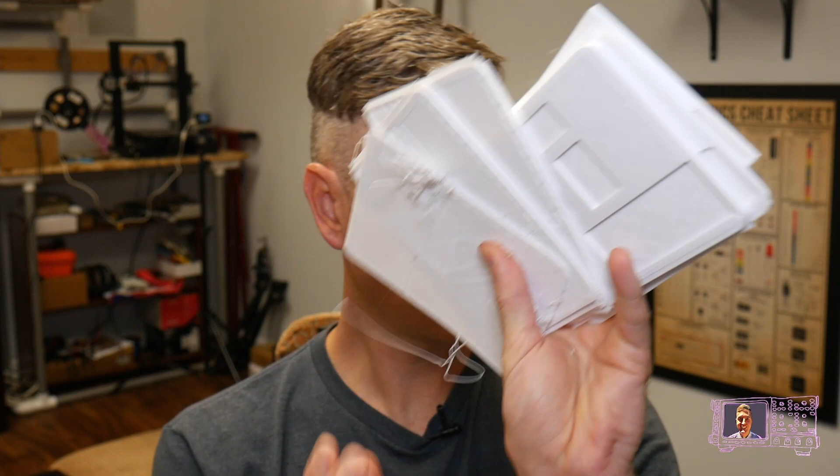I think we should probably set up the show. Let's set it up. We want to say, I'm terrible at 3D printing. I think that pretty much sums it up. Here we go. I'm terrible at 3D printing. I mean, it's absolutely awful, right? Let me see.

Let's get a light in here. This one is particularly spectacular. Look at that gob of filament. Filament is what the kids call it.

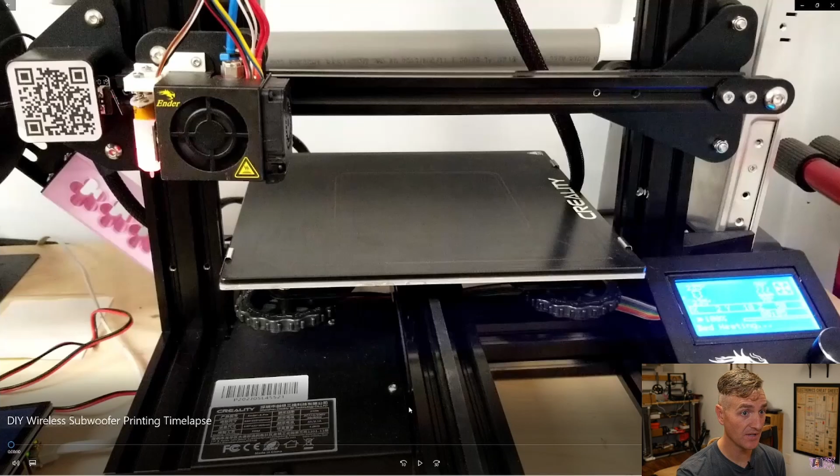So I needed a way to contain all of my pieces, and you'll notice that I have a little 3D printed platform that everything is sitting on, and it's all cleverly arranged. But I wanted to talk about the process of getting from a mess of stuff scattered about on my table into something that actually looks designed and is supposed to look this way.

So here is my 3D printer at work, and this is me beginning the process of prototyping a container. I am not great at visualizing things without actually holding them and seeing them. I guess I can't see it in my mind without seeing it with my eyes. And in order to see it, that's one of the beauties of 3D printing - you can have an idea and then print it out.

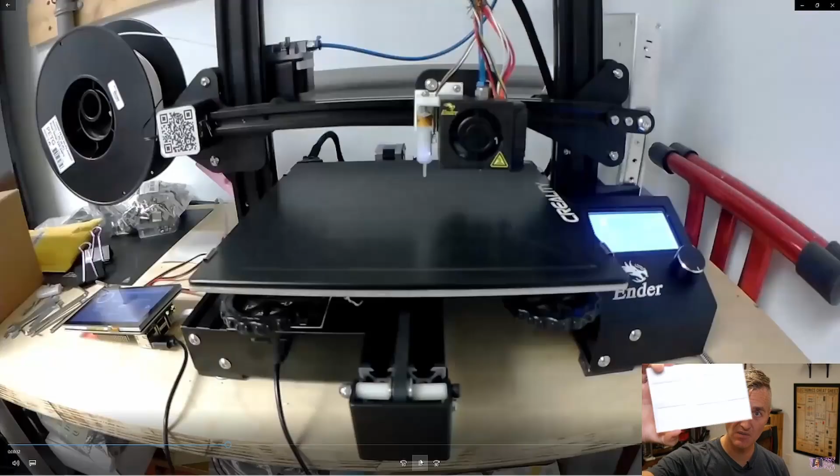So I printed it once. I changed the shape, so I printed it again. Here's the first printout. But the stuff didn't fit in the little holes. So then I printed it again, and you can see here the print is actually starting to fail. I have a little bit of stuff sticking up, so I added a raft.

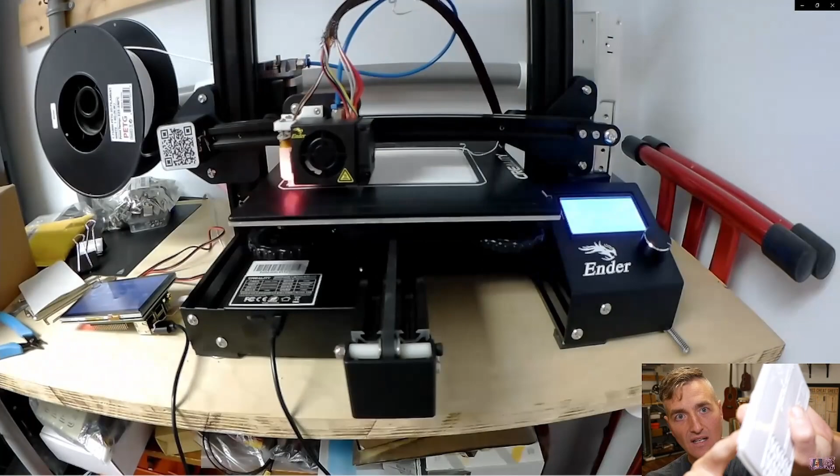Let's see, I have more of this. Here's some of my failure prints. Here's a print with a little bit of a raft - a raft is a layer of filament that you print directly on the bottom to give your print something to stick to. I had repeated failures, just failed over and over and over again. That's been kind of my modus operandi when it comes to 3D printing. I have tons of failures as I try to just get something to stick.

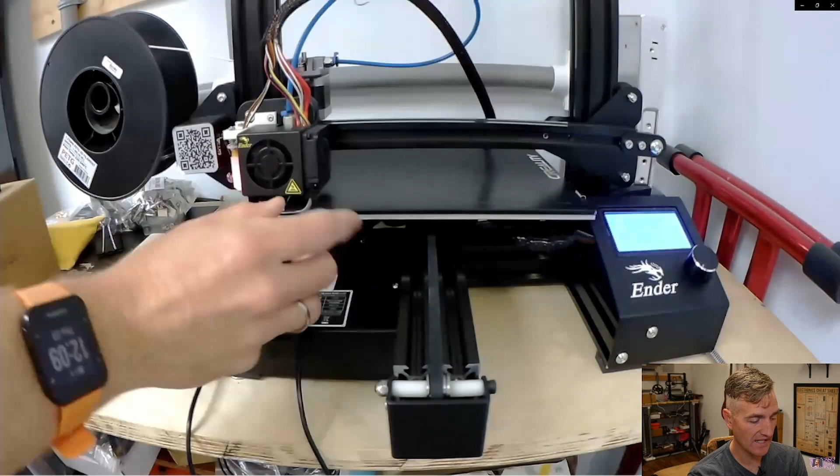One of my problems was I was printing with a material called PETG - P-E-T-G. It's a little bit tougher material than traditional PLA, which is the bog standard printing material. Eventually I switched from my PETG back to PLA, and that's where I got the gold filament out. PLA for me is easier to print - I just haven't mastered my PETG printing.

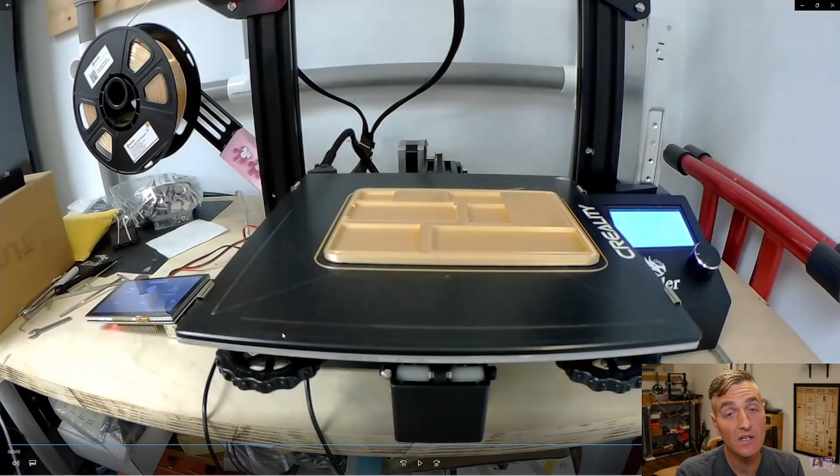There are so many knobs to tweak when it comes to 3D printing. You can print it faster, you can print it slower, you can print it hotter, you can print it cooler.

But what you see on the screen right there is actually what is on my desk right now. So if I go back to the webcam, that is what is holding all of my components. This is where I started. This was actually a really good print, and the edges looked good. It did curl a little bit in the corners.

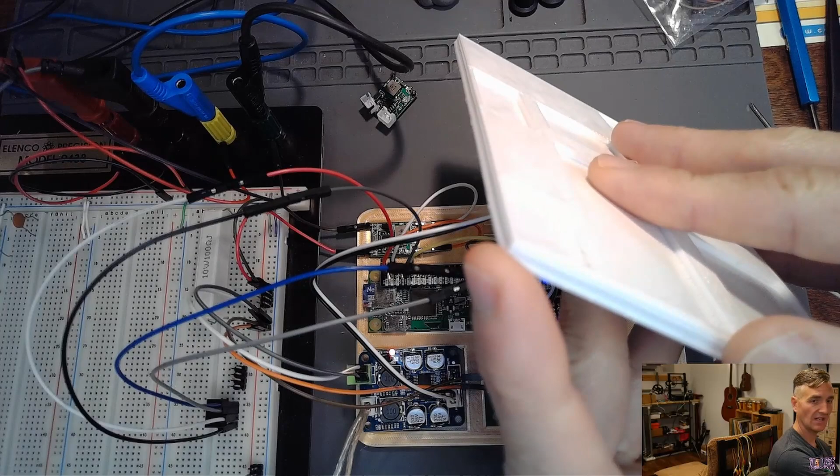I'm not really - can anybody tell me how to stop that from happening in my PETG? I don't know how to make this stop, please. And from there, we really hit the skids. We went downhill, so we ended up with stuff that looks like this, which is a hot mess. Stuff that curled right up off the bed and then kind of came loose.

As your prints curl, they will detach themselves from your print bed, and once your print detaches itself from the bed, it's ruined. It just can't stay still. I got a second pretty good print though.

This was printed with what is called a brim. You see this little edge of filament around the main object. That brim is designed to allow the print to stick itself down to the bed a little bit better.

This corner, I did do a little bit of research on. So this corner is potentially curling because the bottom layer is cooling too fast, and that causes the PETG to curl up, like that. And that's bad. You want it to stay flat on the bed.

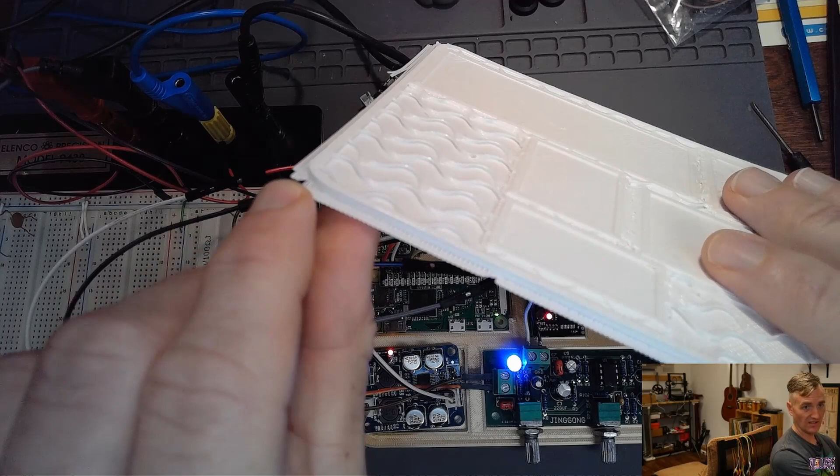The RAFT is supposed to make the bed a little bit more adhesive to prevent that curling. But the RAFT also creates its own set of problems. It's kind of big, and it's a lot of filament to just waste on your print. And it's a little bit difficult to remove, it all gets really stuck together.

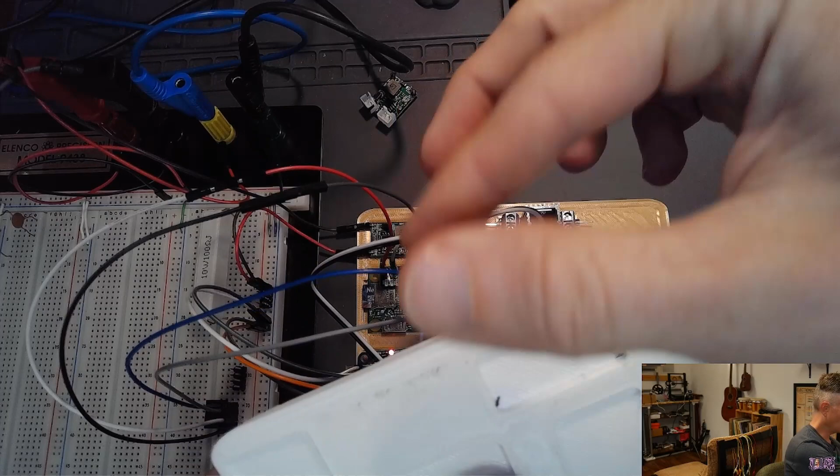I also had a bunch of stringing, these little strings of filament. I did read that PETG is really bad about stringing, and I'm not sure how to correct that. There's again, tons of knobs to turn with 3D prints.

That's the downside of 3D printing. The upside is you can just prototype different box shapes and different containers or just different objects and get them in actual physical meat space to look at, which I absolutely love. That is the only way that I am really successfully able to prototype.

So last time we did some woodworking to do our enclosure, but this time I thought I would try some 3D printing. So this is just a flat board or flat base, and in this base are these little holes, and the holes have been designed to fit the boards.

The big thing I love about being able to prototype like this is that I can put it in my board, look at it, decide that I don't really like the fit of something, change it, and then print it again. So what happened when I printed all this out and set it into this little board, I realized that I have things arranged a little bit awkwardly.

So I have my power up here at the top. I have two different DC to DC adapters for my wireless subwoofer, down into my Raspberry Pi, over into my DAC. This is my subwoofer preamplifier, so that cleans up the high-end audio sounds and allows only the low-end audio to get into my subwoofer amplifier.

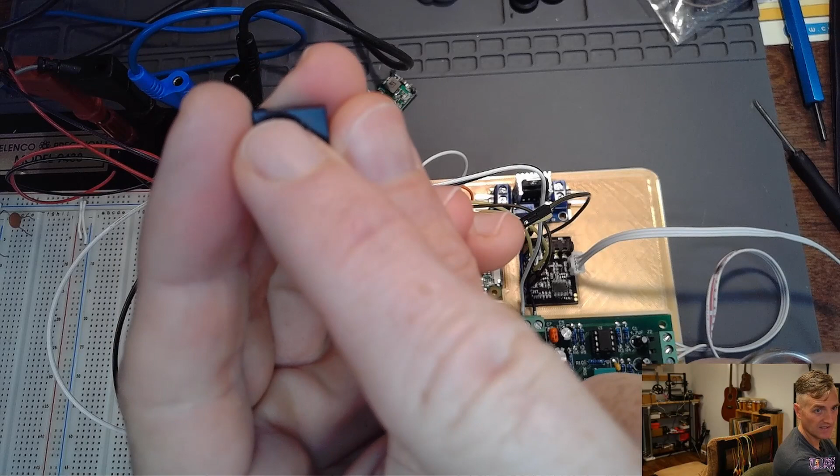And with this device right here, I think I can actually use the power out from my Raspberry Pi. So I think I can use the 3.3 volt lines of my Raspberry Pi to power my DAC, which has definitely been a no-no in the past, as you've watched it all.

You know that the Raspberry Pi's power rail is super duper dirty. It is nasty. You can hear it in the speakers as soon as you plug your DAC into the power rail. You can literally hear just the noise on the power rail.

With this little isolated power rail, power DC to DC converter, since the input is totally isolated from the output, the noise is not allowed to pass through. So let's look at the data sheet for this really quickly.

S-1WR3. Okay, let's turn the monitor on so you can see what I'm doing. So I found this little guy right here, a B0505S-1WR3, an isolated DC to DC converter. You put in a 5 volt input and it creates an isolated 5 volt output.

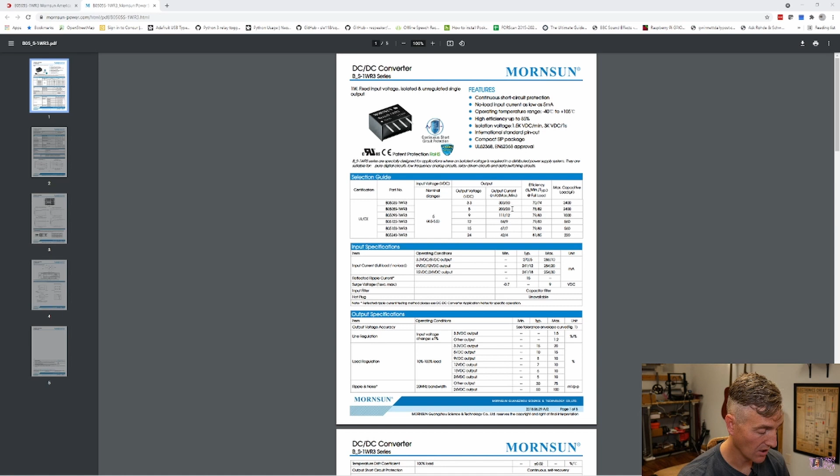One other thing to note when using one of these isolated DC to DC converters is that they cannot actually output much current. You'll see that this little guy can output a maximum of 200 milliamps, which is pretty low power. You would not want to use one of these chips to try to power an audio amplifier. It just does not have enough juice.

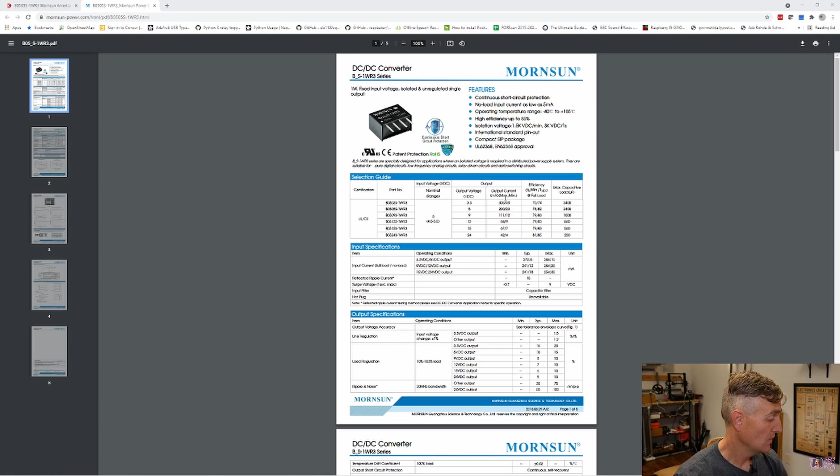For the DAC, though, let's look up my PCM5102. Let's see what the power requirement of this animal right here is. Pretty sure it's low. Here we go, the 5102A.

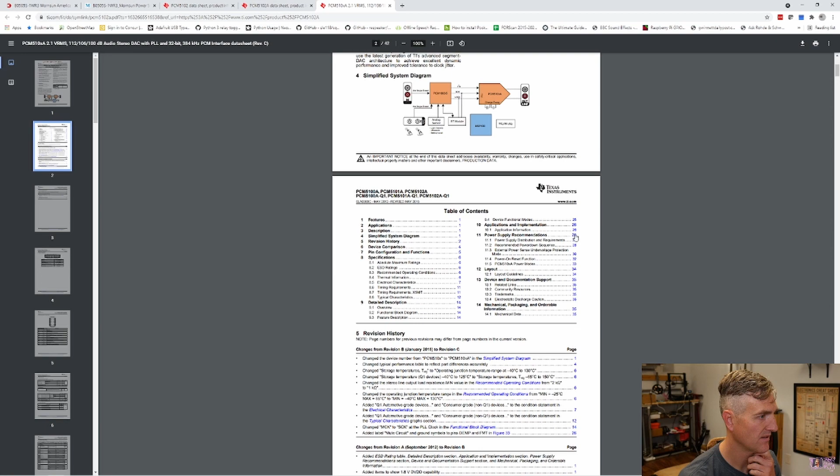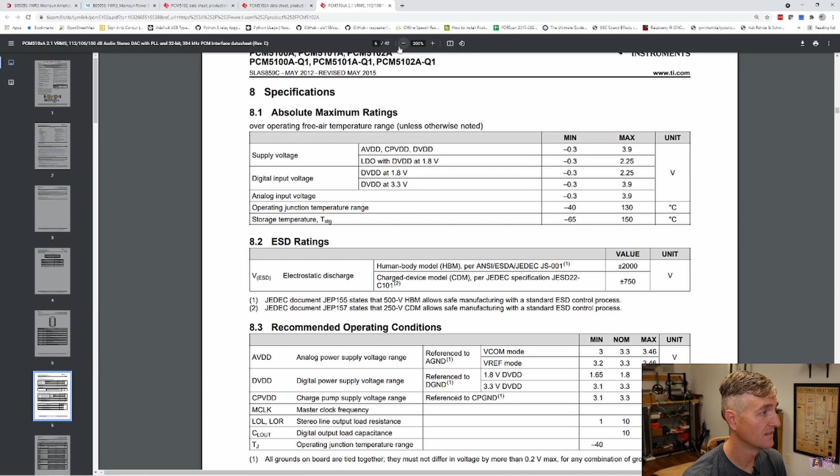In here somewhere, power supply recommendations, there's going to be a maximum current draw. If we go to the data sheet, we are looking for amps. That is what we are looking for, amps. And you know what might help is if I zoom in a little bit so we can all actually read it, because if I'm squinting on the screen of your phone, you really have to be squinting. It's crazy.

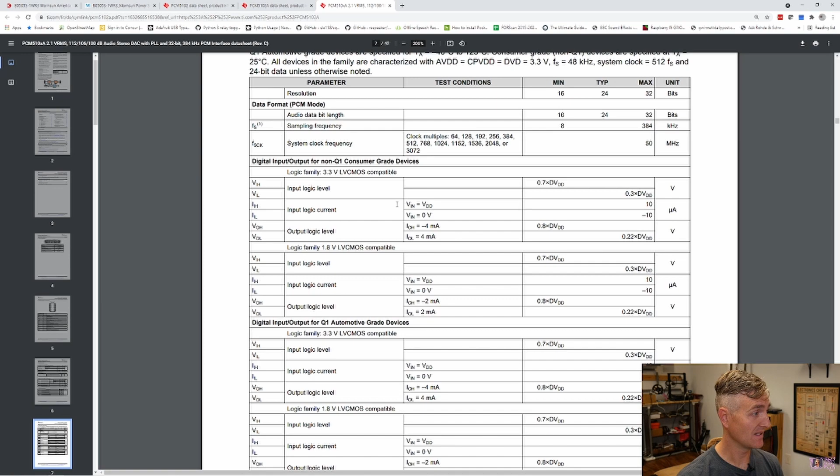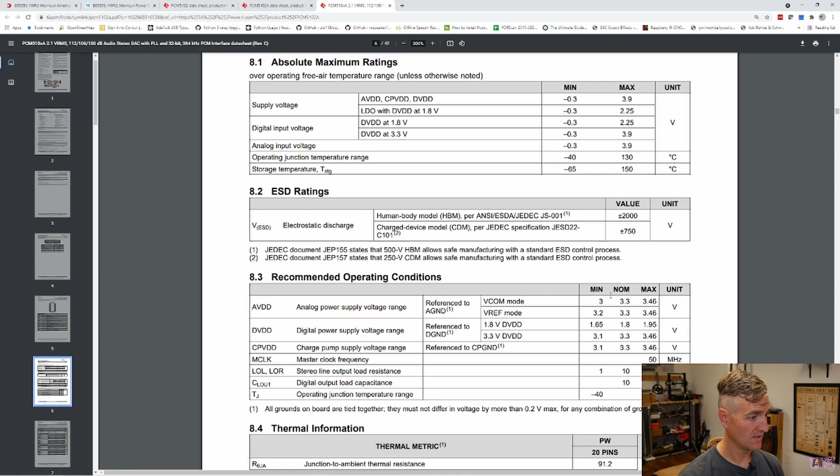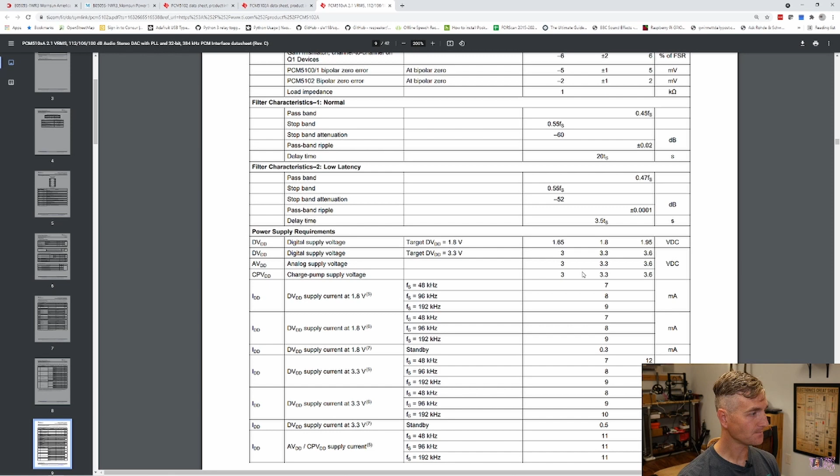Okay, I have absolute maximum ratings for voltage. Does it have an absolute maximum rating for current? Let's see, voltage, the amps—this is in microamps, which is a good sign, because if my power rail can only supply milliamps, then having something requiring microamps is good. Okay, here we go, power supply requirements. Let's see, the maximum number I see here, 12 milliamps, 32 milliamps—oh, now we're getting a little bit high. 185 milliamps, that is the absolute—or 187 milliamps is the absolute maximum.

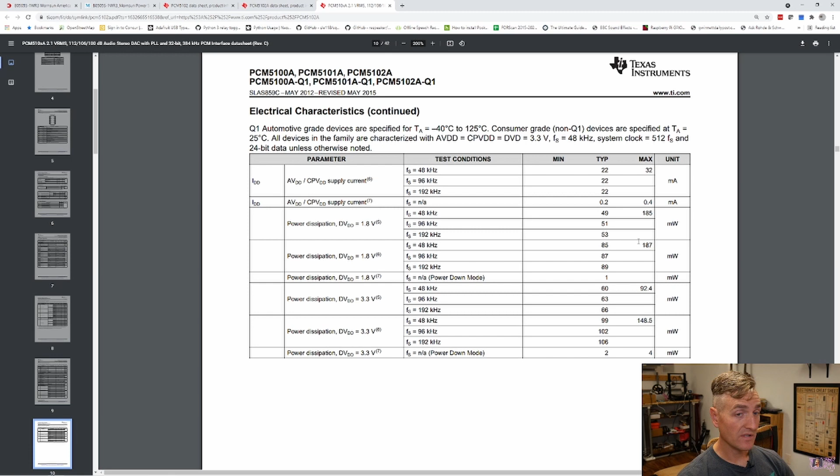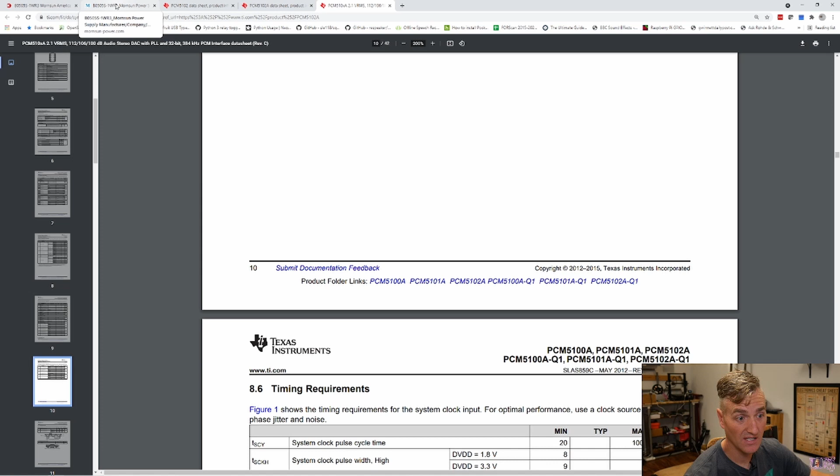And our DC to DC converter can supply 200 milliamps, so we should actually be good. We should be in like Flynn. Excellent news. But that's because I'm only using it to power the DAC. I'm actually using a different power supply to power my amplifier board, which is fine—I just really need to keep that Raspberry Pi off the power rail of everything else in my system, because it will just create a ton of noise.

Now that I'm using this little chip to power my DAC, I have an extra DC to DC converter, this LM317, or I could use another one of these little chips. What is this? This is the MP, I think it's the MP1584. Is that right?

MP1584EN, so I could use another one of these. Anyway, what I'm trying to say is, when we looked at our amplifier data sheet, that is the, I think it's the TPA3118. Is that right? Pretty sure that's right. There we go, I should probably bookmark these. But this is the amplifier that we are using.

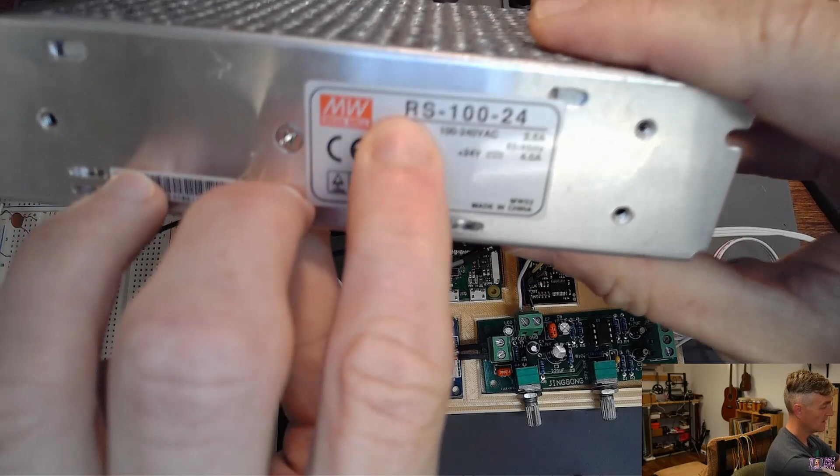Right now we are powering it with 12 volts, but that doesn't allow it to reach its maximum power. You have to use 24 volts to get to your maximum power. So with that in mind, I purchased this little guy right here, this little Meanwell RS-100-24. It's a 100 watt, 24 volt power supply.

Yay! But all my DC to DC converters are set up for 12 volts, and I need to set them up for 24 volts. Also, this preamplifier wants 12 volts, so I need to convert this 24 volt power rail into 12 volts. So that's going to be down the road, getting all my power rails straightened out. And while I'm straightening out my power rail, I kind of want to reorganize this.

So let me show you the tool that I used, so I can embarrass myself on YouTube here. The tool that I use to do my 3D printing prototyping, Tinkercad.

You'll notice that we also have a dollhouse. Lil G, the junior O-scope wizard, is working on a slingshot. And I have my wireless subwoofer box. Oh my goodness. Well, here it is.

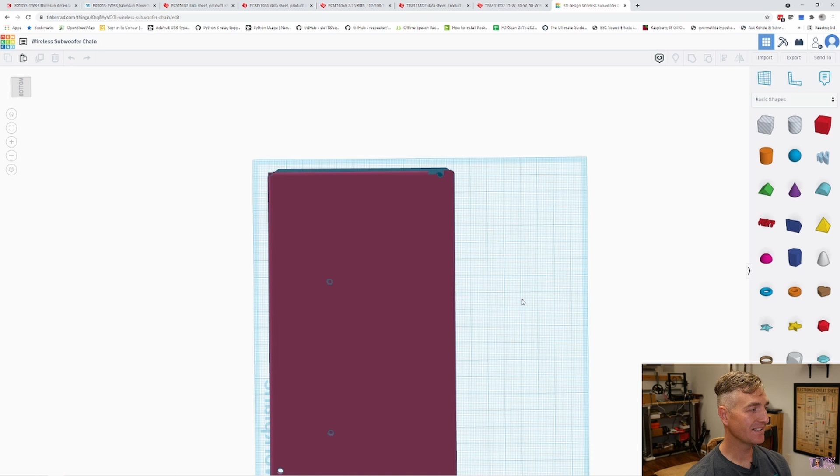I like Tinkercad. I know there's much more professional CAD tools, computer-aided design tools, but Tinkercad is so easy that I can work with it and not have to spend hours and hours learning it. I can just make things happen.

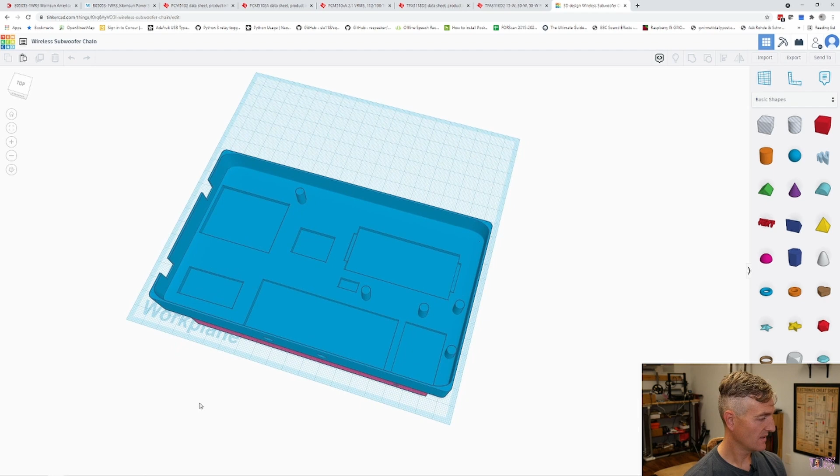So here is my box that I kind of have morphed into, and you can see this box that we're looking at online is actually printed out right here now. There are some problems. Right away when I printed this, I could see that the outside walls were too thin. They're super thin and so have just no structural integrity.

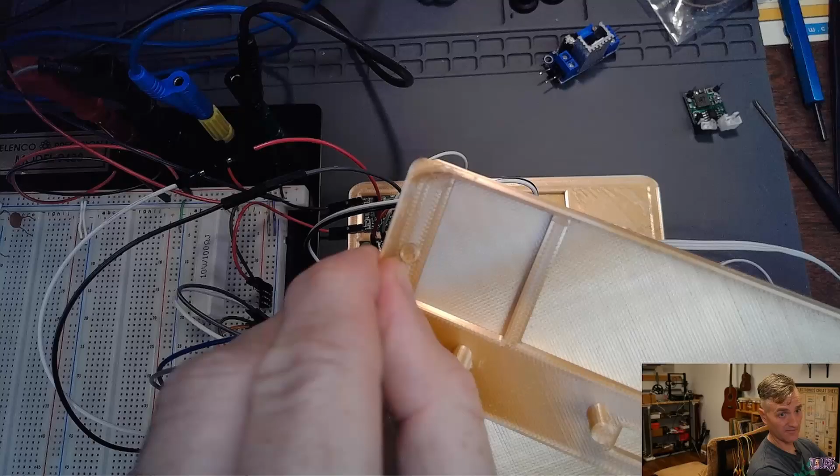And these little posts are going to be kind of wire guides to allow my wire wrap to basically keep my digital lines away from my power rail lines. This wire guide was too close to this wall, and it snapped off when I was trying to cut some of the stringing out from the inside.

But, I've reorganized this, so now my preamp sits here, there's going to be a DC to DC converter sitting here, and then my amplifier's up here, so my 12 volts or 24 volts should all stay over here, and then my Raspberry Pi sits way up here away from the audio chain. Hopefully kind of keeping the noise to a minimum.

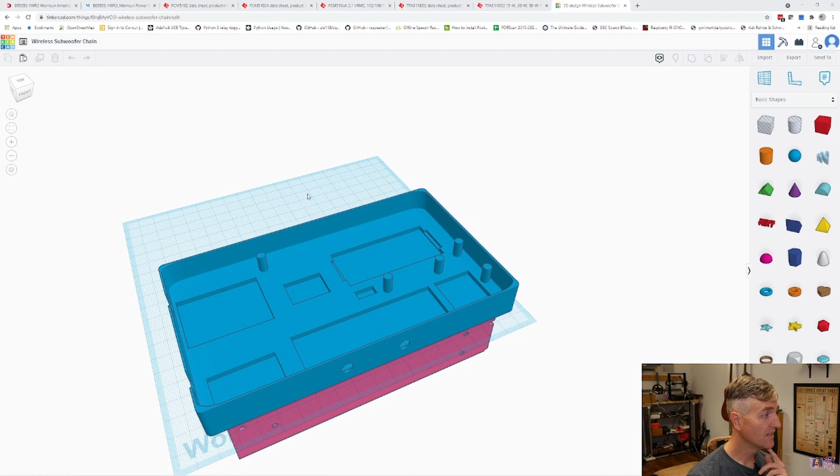But if I get back into Tinkercad, we can actually look at what I've been doing. So this shape is a combination of tons of shapes, and that's kind of how all CAD works. You start with simple shapes and then start adding more and more shapes, and then you combine them all and you make more and more grandiose designs.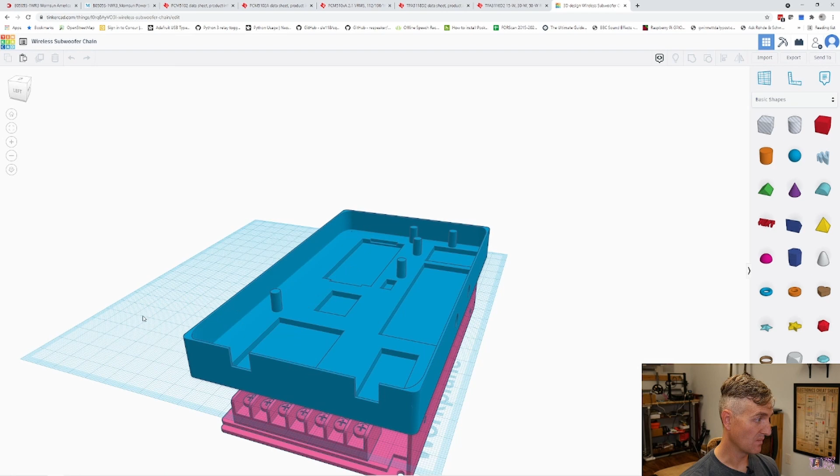So this started out with just a simple box, and then I made holes, but underneath I actually imported a model of the Meanwell power supply, thinking that eventually this top enclosure will connect to some kind of second enclosure that will go around the power supply and allow me to sandwich them together and somehow attach them to my actual subwoofer in a bucket. Either screw them to the lid, or put them in the bottom.

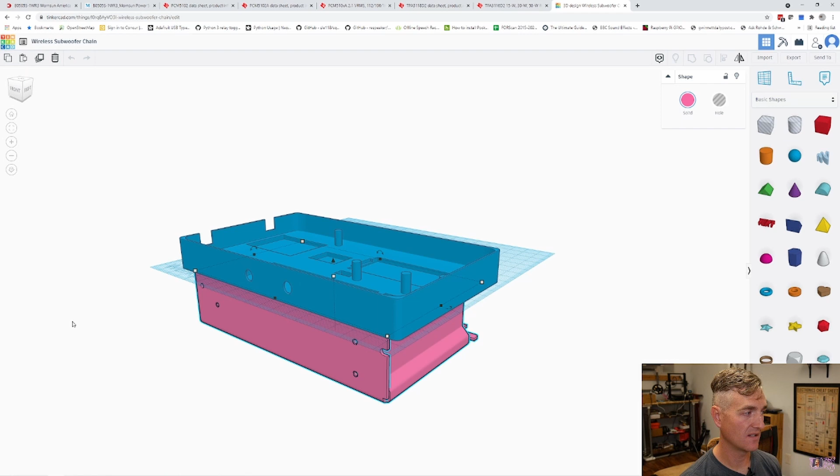I do need access to some of the knobs of the preamplifier, mainly the volume and the filter knob, really just at the beginning to set it all up. And then that could be put away into the side. I'm a constant tweaker though. If there's a knob, I'm going to turn it.

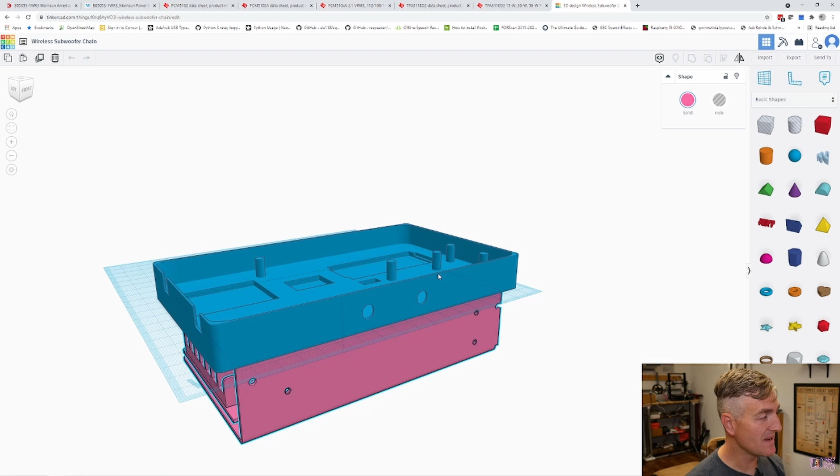So I'm not sure how that's going to go, but I want to make a box. Let's look at what goes into this.

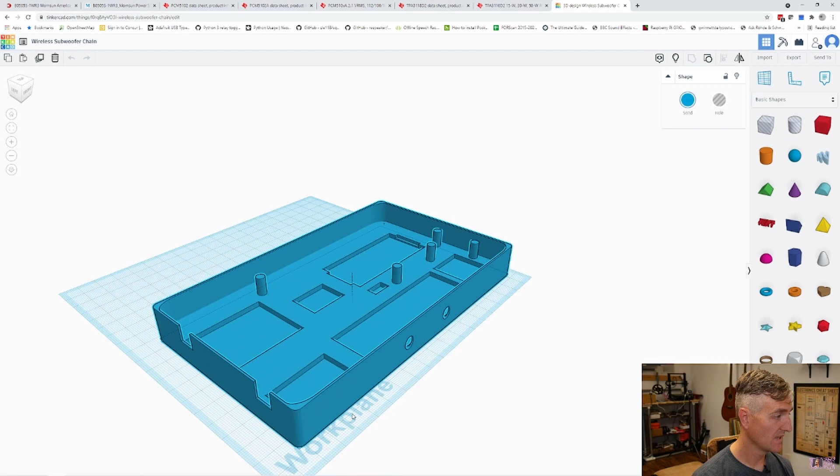So if I start into Tinkercad and I ungroup everything, first of all, I want to take this power supply model and hide it, just to get it out of the way. And then let's take a look at everything that goes into this box.

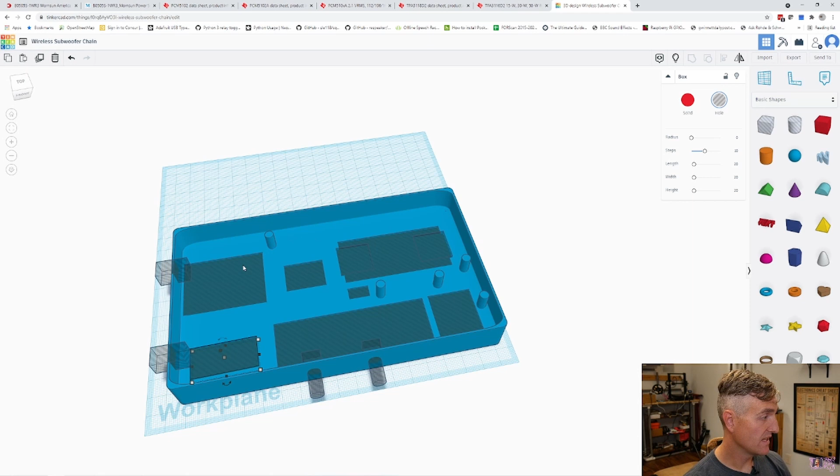So here is the first stage. I have a bunch of holes that represent the different components in my design. And I can move these holes around, and I've printed them enough to know that these holes will actually fit the board. Now I had to adjust these holes about 10 times before I got them perfectly around the boards.

I do have a micrometer, and I actually did use the micrometer to measure the stuff on the boards, to measure the dimensions of the boards. I'm not a mechanical engineer, so I don't understand tolerances that well, but you needed more and more tolerance.

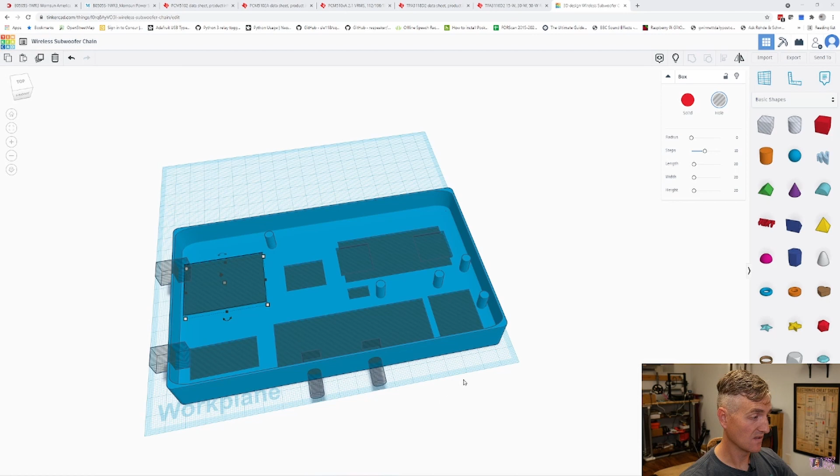You don't want too much extra space in the hole, but enough space that my printed circuit board can fit snugly into these little spaces and not move around. I was thinking I might use just a dab of glue to hold them in. Some boards actually have screw holes in them, so I could add screw holes into my design - that feels like next level stuff. You can see the level of detail I'm able to work with. But I need to make these outside walls a little thicker, and I need to do a test fit with the one I've printed now to see how the wires work through the system.

I have to hold things to really understand how it's going to fit together. I just can't do it in my mind - I don't have that skill. That is a wonderful skill to have. I don't have it.

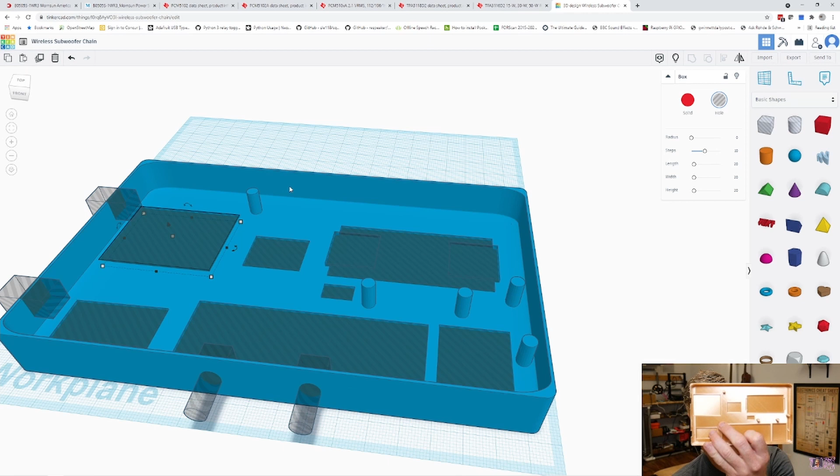So before I print this again with tweaks, I'm going to put everything into this container. I'm going to run some of the wires through to see how it all fits, and then go from there. What we can do right now is pull all this stuff out and start moving it over into this box that I've printed up and just see what it looks like, which might be kind of cool.

Another thing I need to do - let's turn the camera so you can see me - is figure out what I'm doing with my Raspberry Pi endpoint here and Logitech Media Server.

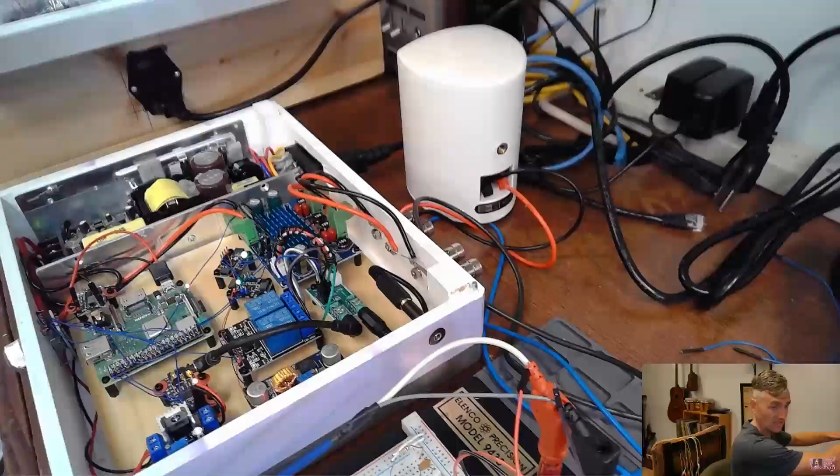On the last episode, and a couple episodes before, I've talked about Logitech Media Server, which is the server software I'm using to move music around - to get music from my phone or device out to the speakers. I have a speaker right here, and then my subwoofer down here. So I need to get the music off my device and into those speakers, and I was using Logitech Media Server because it allowed me to wirelessly synchronize different devices.

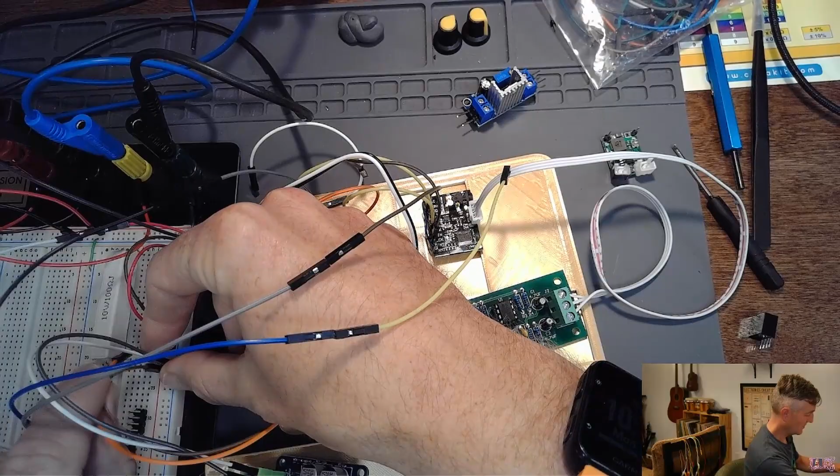But it doesn't work 100% of the time, especially from Spotify, which is my main streaming service. So I need to do a little more research on how to make a more stable connection. I also need to figure out how to turn the amplifier off when I'm not using it - how do I utilize the mute function? Both of my amplifiers, the one in the subwoofer and the one we made before, have mute features that can work. Now, do they work? Only if I wire them up and program my device to actually use that feature. I think Logitech Media Server allows me to do that.

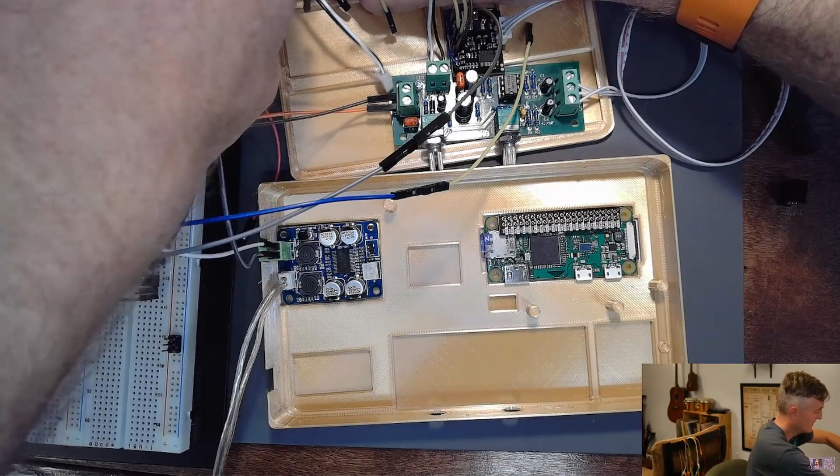Okay, so right away I can see a mistake I made. I made the holes for a lot of these boards a little too deep when I printed it. You make mistakes right out of the gate - everybody makes a mistake, and that's okay. That is the beauty of rapid prototyping: fail fast, and then just fix it. Don't worry about it, that's why we're prototyping to begin with - we're trying to see if things just fit.

Okay, so I have my amplifier board here, my DC to DC converter here. I'm going to switch it out - I have a different DC converter, the same one but with the pins connected a little differently. Raspberry Pi here - actually fits, that fits pretty good. Now I need my DAC, my digital to analog converter, goes here. I think it'll actually go like this.

Oh, now I'm realizing - if I put it like this, it is close to my preamplifier, you can see. I have some holes that I'm hoping actually fit. This is the real test - I have walls now and holes in the wall to try to fit these knobs. Y'all are about to see me do a test fit for the first time. We'll see how good this fits.

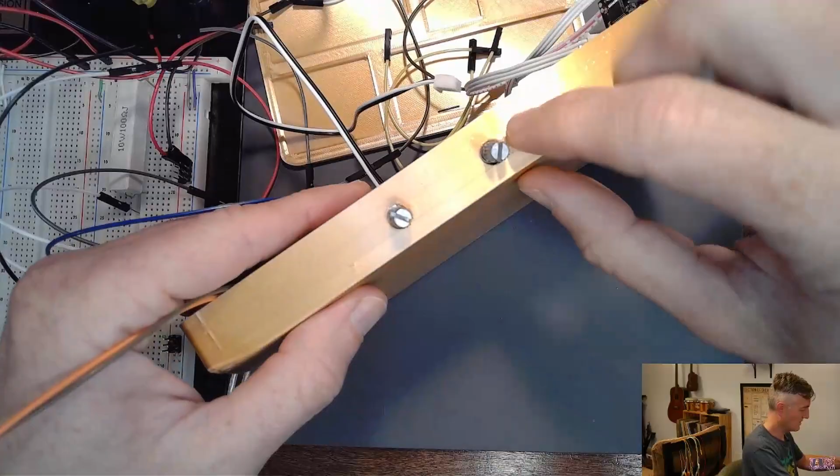Oh my gosh, does it fit at all? No - look, it does fit, but I need more space on these holes. These holes are tight - not light tight, they're tight around the knobs. Ah, so I messed that up. That's okay, that's why we're prototyping.

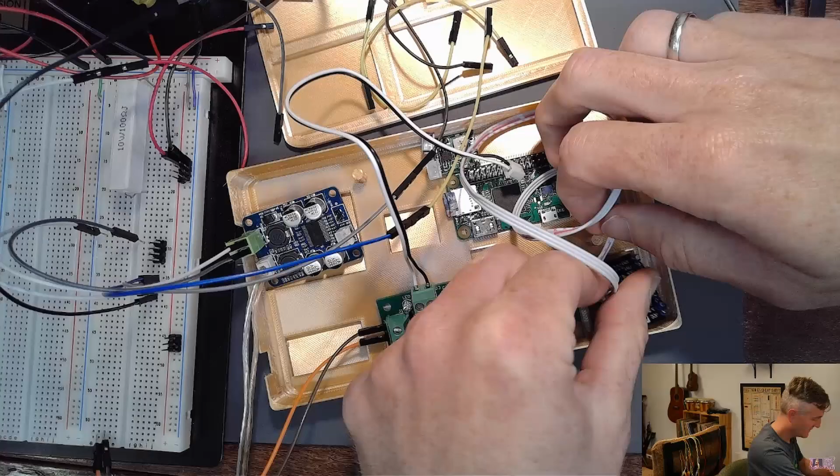Okay, so that goes there roughly like that. Need to make these holes bigger. And then I have a spot for my DC to DC converter for the 24 volt to 12 volt from our preamplifier - that fits well. And finally I have my little isolated DC to DC converter that hopefully fits in this little hole right here - and it does, it does. So we have our layout roughly like this. That feels pretty good, you know?

I'm noticing that with the DAC pointed this way so that I have my audio signals directly into my preamplifier input, the power is on the bottom, and the power is going to come from the Raspberry Pi. I actually want the Raspberry Pi like this, so I don't want this power signal to go around my audio signal. So I'm not sure how to route that. It's a good question. I might need to... if I do it like this, then my audio signals would still cross over my power signal.

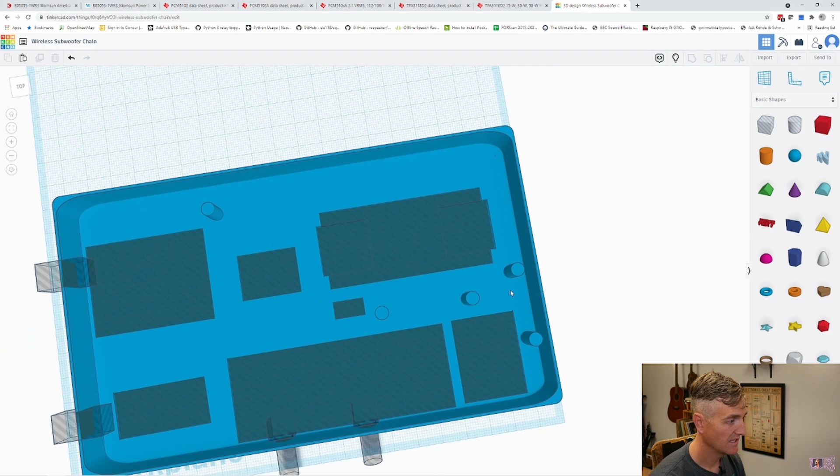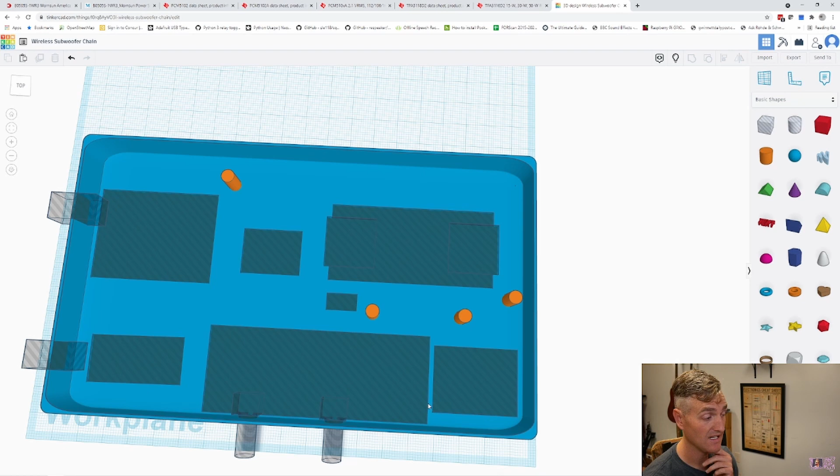The beauty of 3D printing is that you could just make a real quick change. So for instance, if I wanted to change the way the DAC is sitting in there, I can go back to my Tinkercad software and select the hole that represents the DAC, this guy, and rotate it 90 degrees. Now I can see that, oh, this is going to be in the way. I probably need to ungroup some of these things. So let's take this post, delete it, move this over so I had a little bit more space. Now the audio output could go from the bottom side of my DAC over to my preamplifier.

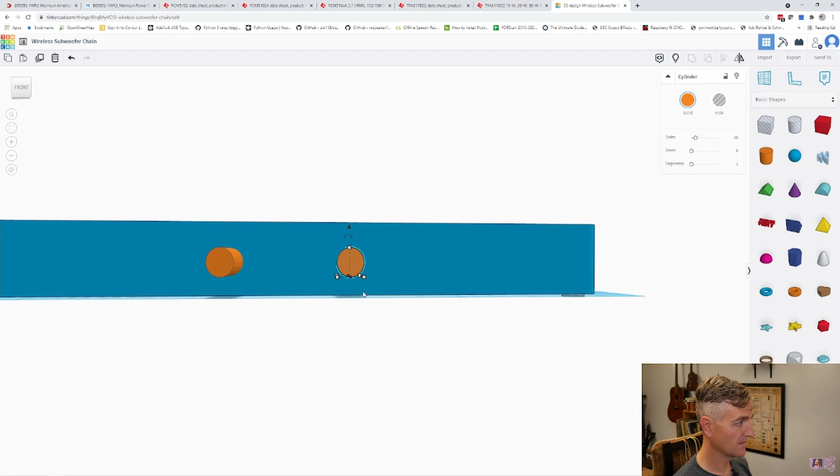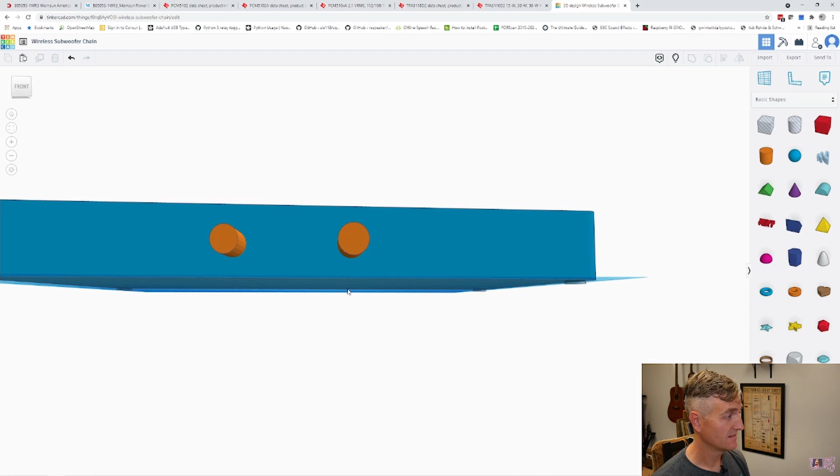I can also go over here and ungroup this. I know that these holes need to be a little bit bigger. So how can we make this hole a little bit bigger? I could make it that, like that, and that's a slightly larger hole. I'm sure there's probably an easier way to do that, but that's why I'm using Tinkercad, because I'm just not the greatest CAD artist that there ever was. I'm going to undo that because I'm just not sure exactly if that was the right move.

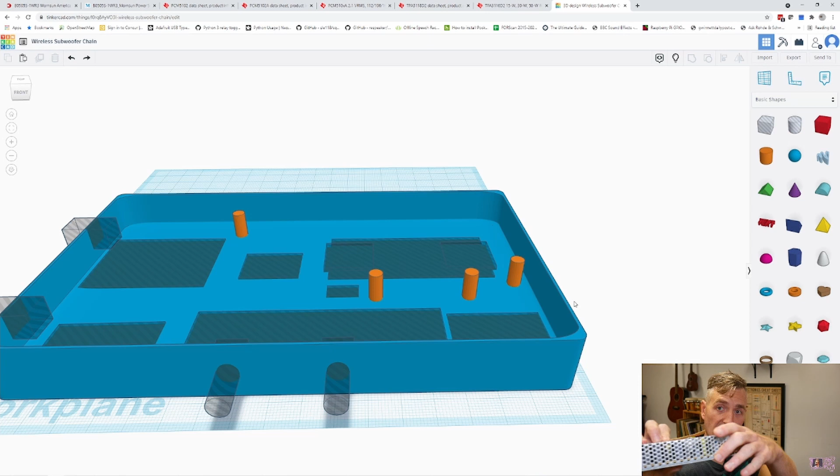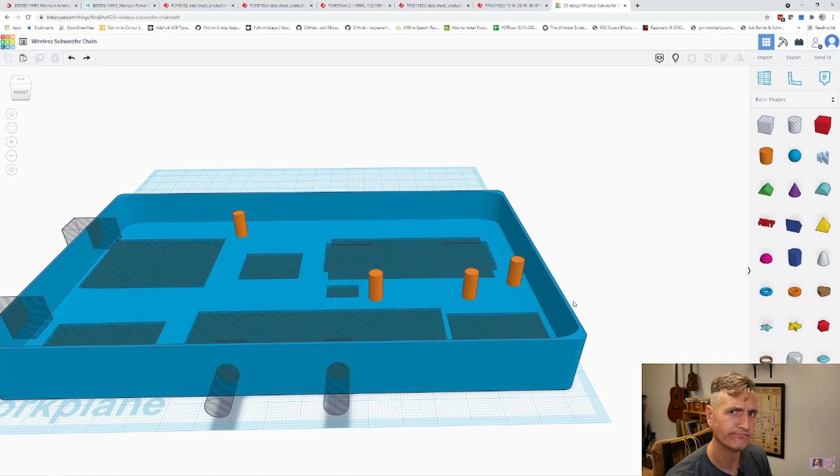Anyway, you can see where we're at. We're still prototyping the container, trying to get everything arranged inside of my container and then eventually attached to this power supply, kind of sitting on the top. So I'm thinking there's going to be a lid that kind of goes around the edge of the power supply, and then the other part sits on the top. Or really not a lid, just a whole box that probably goes around the whole power supply. All of that will go into some sort of weatherproof container that I will purchase, because I don't think I can print a weatherproof container. I'm not sure that's me. I don't think I can do that.

Next time, I'm not going to be doing 3D printing. Hopefully that'll be all done off camera because I'm so bad at it. I hesitate to show you guys, I don't know why. I don't know why I should be embarrassed about that. I'm not embarrassed about failing at electronics, which I'm supposed to be good at. But it's kind of boring to watch somebody just CAD if they're not great at it.

I'm just going to print out some more boxes. I'm going to get this thing at least laid out inside of the box so that it can get sound out and connect to this new 24-volt power supply. I also want to experiment with how to control the amplifier turn on and turn off with Logitech Media Server, with the service running on the different devices. That is going to prevent unwanted noise from exiting the speakers, because unless there's music playing, there would be no sound coming out of the speakers since the amplifiers would be turned off. Also, it would save tons of power. That's how my previous amplifier design worked, and I had to write a little Python script that ran as a service. I don't think I'll have to do that this time. I think I can just use the services that are already built into the software. So we're going to explore the software a little bit more, see if we can control our hardware with the software as it's made. Eventually, we're going to put all this in the driveway and make some beautiful music.